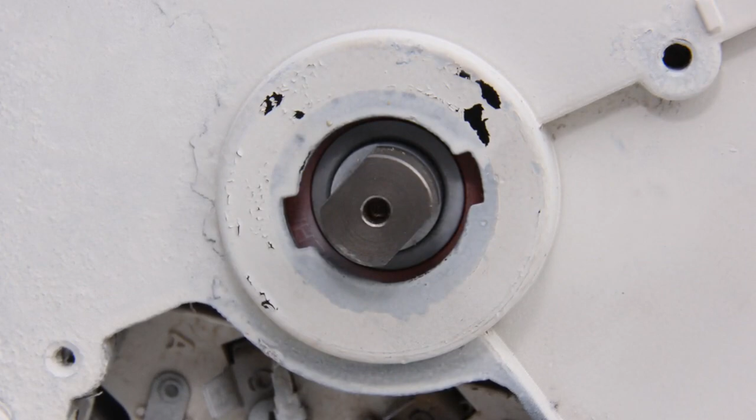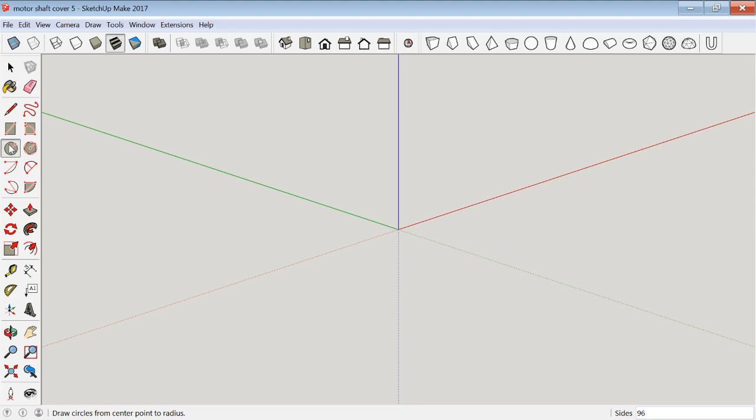To make the replacement motor shaft cover, I'm going to start with a circle. Choose the circle tool from the toolbar. Click it once, then type 96 and enter. This will give the circle 96 sides. Then go to the origin point, click once, and start pulling along the red axes. Type in 25.5 and enter. This will give it a radius of 25.5 millimeters and a diameter of 51 millimeters.

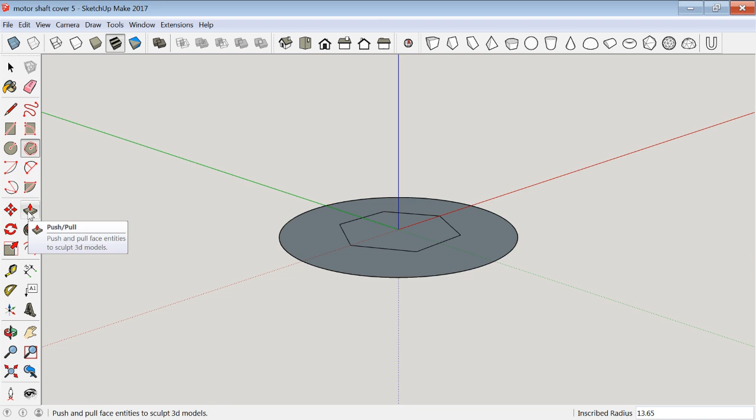Next, to add the hex head portion on top, choose the polygon tool by clicking on the polygon in the toolbox. Then click the origin in the middle of the circle and start pulling along the red axes. Type in 13.65 and enter. Now we need to pull the circle up to 2.1 millimeters. Click on the push-pull tool and then over on top the circle portion. Click once, start pulling up along the blue axes. Type in 2.1 and enter.

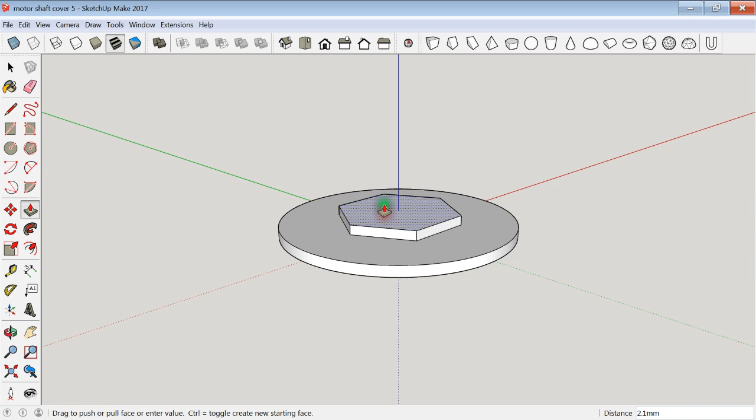Then go to the hex portion of it. Click the control key to get the little plus sign. Click the push-pull tool on the hexagon and then pull up to the face of the circle and click once. Next, click on the hexagon again and pull up and then type in 10 and enter. Now, pushing and holding on the mouse scroll wheel, turn the part so you can see the bottom. Using the eraser tool, erase the hexagon from the bottom.

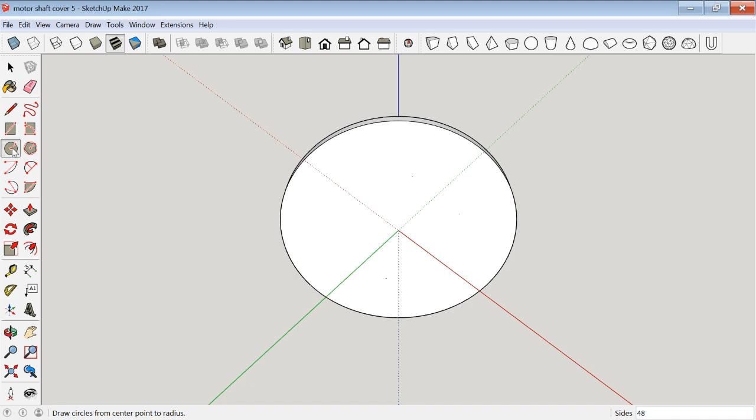Next, we're going to work on the circles on the bottom. Again, click the circle tool on the toolbar and then type in 48 and enter. This will give this circle 48 sides. Since this is a smaller size circle, SketchUp won't let you use 96 sides. It'll say that the number of segments is too large. Click at the origin point and then again moving out along the red axes, type in 10.15 and enter. And starting at the origin again, click and start pulling out and type in 13 and enter. And one last time, starting at the center, click once, pull out, and type in 17 and enter. These parts will end up being the bottom of the shaft cover.

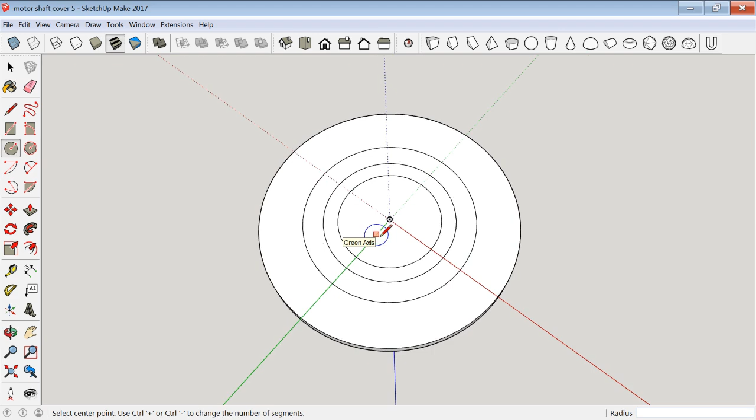Next, select the tape measure tool from the toolbar. And starting on one of the axes, I'm going to use the red axes. Click once and start pulling out and you'll have a dotted line. Type in 3.85 and enter. And do the same the other direction. 3.85 and enter. These are the guidelines for the tab on the outside edge.

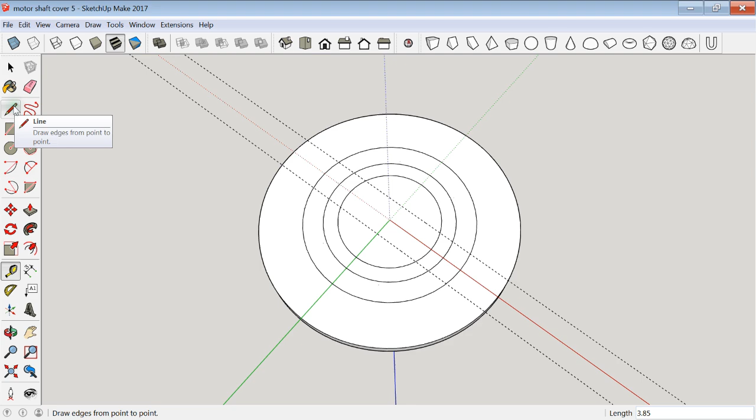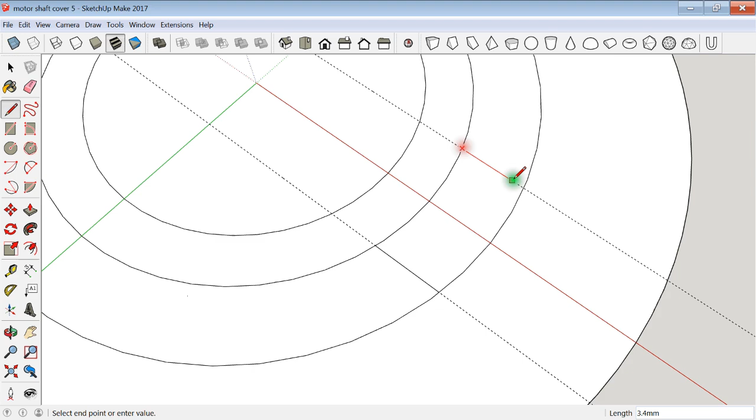Next, select the line tool from the toolbar. I'm zooming in by using the scroll wheel. Click on the intersection of the second circle and draw a line out to the intersection on the third circle, using the tape measure lines as guides. Do this on both sides, so there'll be 4 lines. This is the part that will define the tabs. Now select the eraser tool from the toolbar and use that to erase the guidelines and also the extra pieces of arc from the tabs.

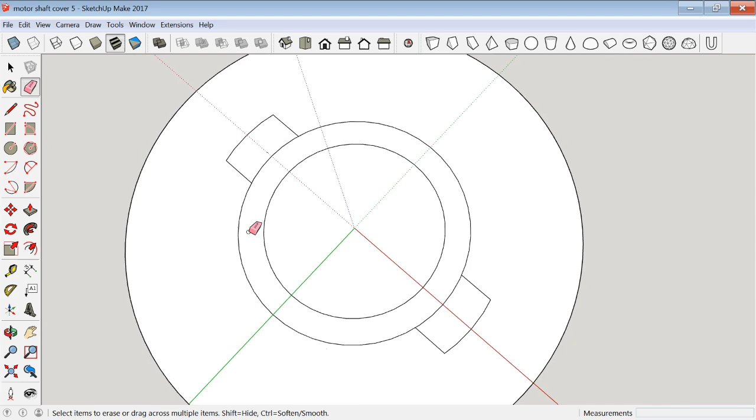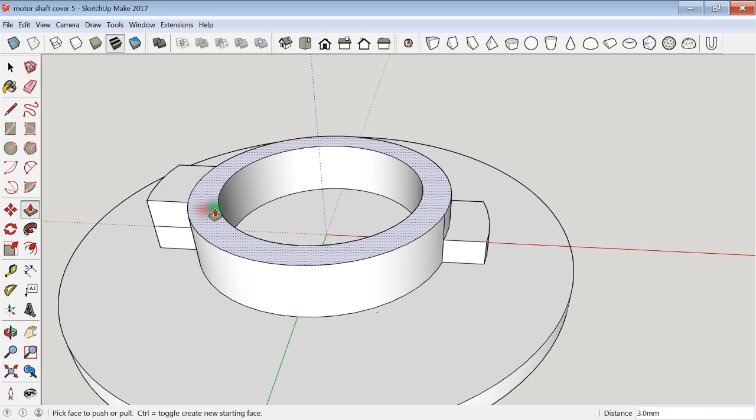Now we're going to pull the ring up to 5.7 millimeters. So using the push-pull tool, click on the ring and start pulling it up and type in 5.7 and enter. Next are the tabs. Click the Control key once to add the little plus sign on the push-pull tool. Click on the tab and pull up 2.7 millimeters. And do the same on the other side. And you can either type in 2.7 or you can use the first one as a guide point and click on it. Need to pull them up to the top of the ring, so make sure you click the Control key so you have the little plus sign, click on the top of the tab, and then come up to the top of the ring.

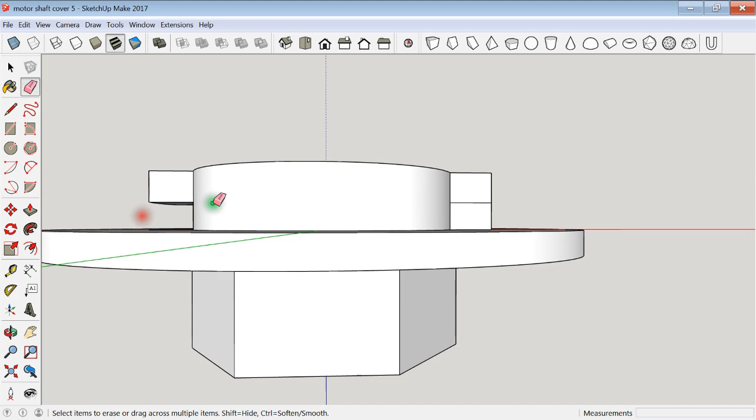Next, we're going to erase the bottom portions of the tab. So using the eraser tool again, tip the cap over on its side so you can see underneath and erase the bottom portion of the tab. And do this on both sides.

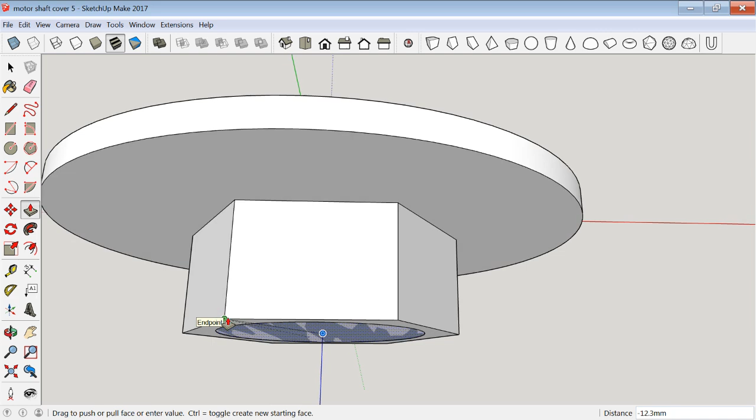Next, the push-pull tool again. We're going to push the center in for the motor shaft. Going to push it till it's almost through the other side. If we bring it all the way down to the bottom face, we'll see that it's about 12.3 millimeters. So with that, let's type in 10 and enter. That'll leave a space for the plastic underneath, which we can see if we use the X-ray tool.

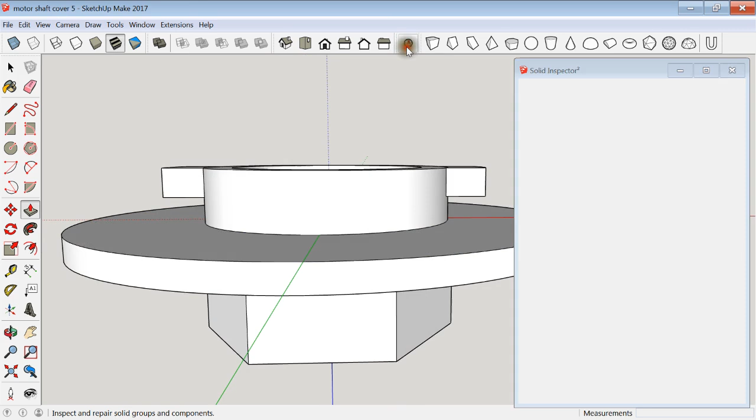Now to check for cleanup, click the extensions, CleanUp with last settings, and that will get rid of extra lines. Next, with the solid inspector, we can see that it has some internal faces and some reverse faces. If we look at the X-ray, we can see where they are to make sure that solid inspector can take care of them okay. So the internal faces are on the inside of the tabs. We can let it fix it. The reverse faces on the bottom, we can let it fix that.

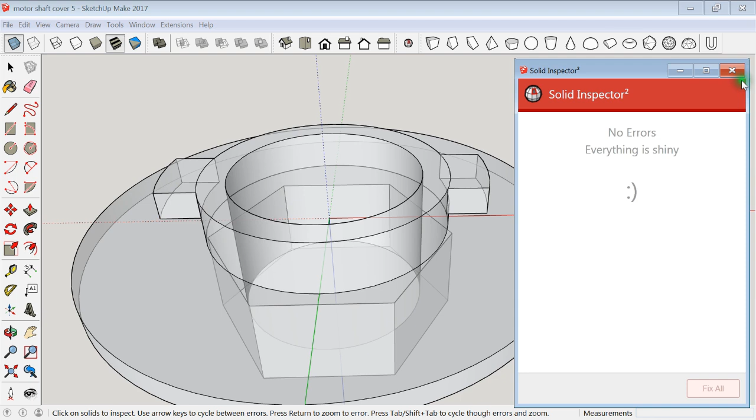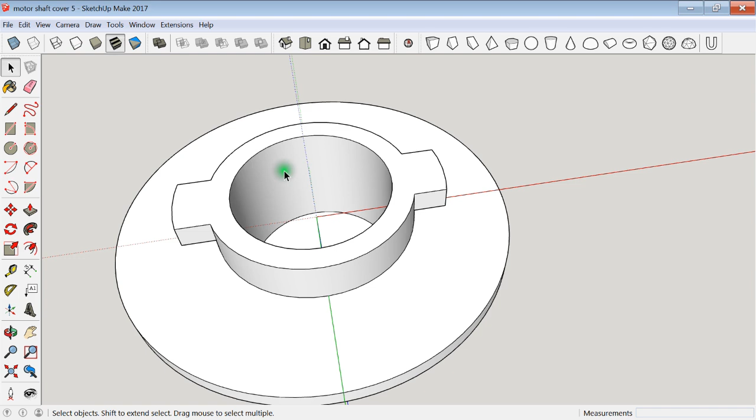At last, we could clean it up a little bit more by using the extension cleanup tool again, and it'll get rid of any extra lines along these top faces. And then finally, save the item and export the STL to make it ready for printing. And this item would definitely need to be printed with support to print well.